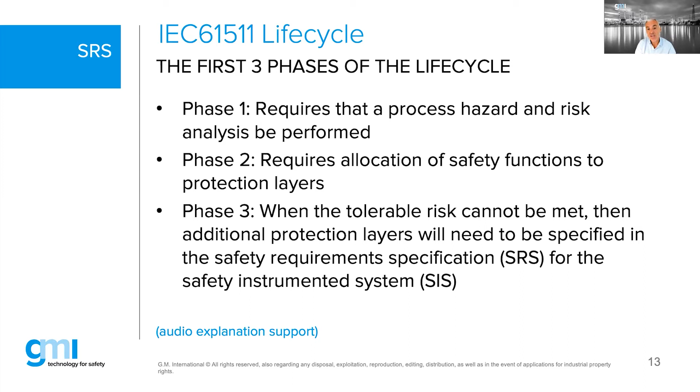I got the first poll question that Mauro will launch, and I will read the question in the meantime. I would like to talk about the ownership of a safety requirement specification before we start the webinar. You have the following options. Does the ownership of the safety requirement specification lie with the safety consultant or safety company? B, the engineering contractor, the EPC contractors, responsible for the SRS and its quality. Or the SIS integration team.

Or it is the operating company or the end user who has the ownership. Or the operator and maintenance teams, the people responsible to maintain and operate the SIS on site. Or the MAC contractors, the main automation contractors, or G, all of the above. Which one do you think has the ownership of the safety requirement specification?

Okay, we are getting a good response so far. Let's wait a few seconds again to give everyone the chance to answer. I see quite diversified answers, so you will comment later on, Tino. Mm-hmm. Good. Let's give it another few seconds, then stop it and share the result. I think we can stop it here. Shall I share it? Yes, please. Okay, here it is.

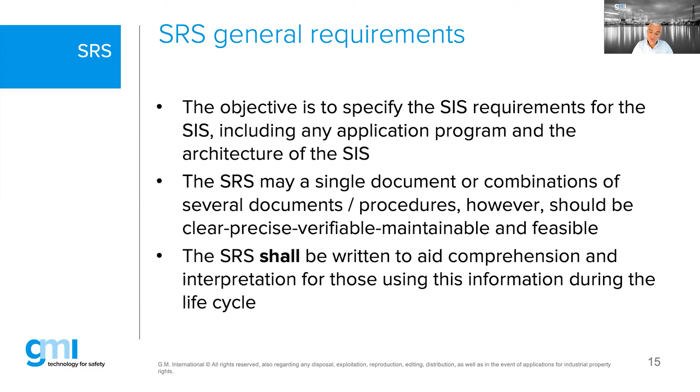The SRS may be a single document, but in reality, it's almost always multiple documents. The more documents you have, the more of a challenge, call it a mess, it will be in the future to maintain a clear revision between all the documents. Of course, an ultimate document would be everything in one, but that's nearly impossible or impractical to maintain and also to use. But the standard describes that the safety requirement specification needs to be practical for the people who need to use it. The SRS shall be written to aid comprehension and interpretation for those using this information during the life cycle.

Now, the standard is very clearly and very strongly telling you the following sentence, and I actually copied the sentence, which does not often happen in some of the webinars. I'm relating my story here to part 1 of the standard. Part 1 is the normative section, in contrast to part 2 and part 3, which are the informative sections. For us as safety engineers, for everything in the normative section no discussion is possible. It is what is written in the standard. And if the standard says you shall do it, then there is no debate possible. You shall be able to provide evidence if you want to comply with the good engineering guideline called IEC 61511. So it states the following sentence.

It describes 29 specific requirements per safety instrumented function that shall be sufficient to design the SIS and shall include a description of the intent and the approach applied during the development of the SIS safety requirements. And I put something here in blue. The sentence finishes with "as applicable." You can already imagine, if you are a creative engineer, you can say, well, I want to list my 29 items and I want to answer not applicable. And mainly the engineers will abbreviate this as N.A., not applicable, because it's very easy for them to cut, copy, paste.

I can tell you that when we are doing an assessment on site and some engineers or end users give us a safety requirement specification and we see multiple not applicables, we may be very critical to understand why you believe it's not necessary to describe this. Because you have to figure out the following. Someone who opens this document, who has zero know-how of what went on before the document was released, needs to be able to clearly understand what needs to be built in your factory or production unit to achieve a safety function that works to achieve your safe state.

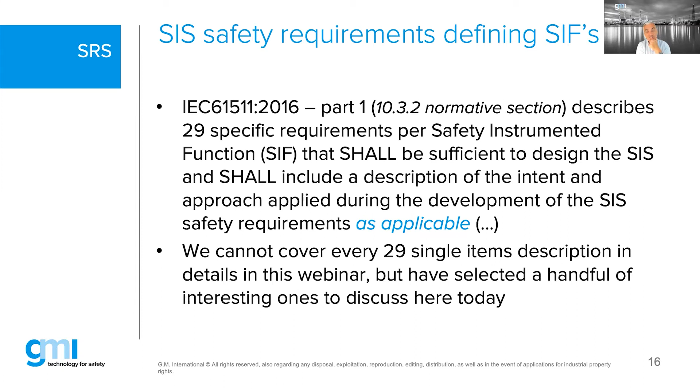We will, of course, not cover it all here; as Mauro is saying, we only have a maximum of 1 hour, and I typically keep my speech between 30 to 40 minutes. I always overrun, but I will try to do my best today. But we will not be able to handle all the 29.

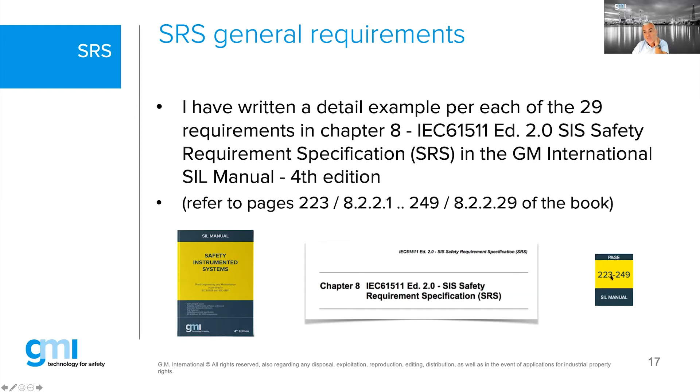But in that book, which is the 4th edition, in chapter 8, I have been including an exact one safety instrumented function, including all those 29 different items. That means that I have been describing the definitions from a standard, bullet per bullet, starting on 8.2.2.1, all the way down to bullet 29. Bullet 1 starts on page 223, and it goes all the way down to page 249, which is the reference given from the book from GMI.

Typically, a safety system is working through a digital output. It may go through one of the interposing relays, and make sure that you choose a safety integrity relay and not a normal interposing relay. Otherwise, you may lose the complete integrity of your safety loop. But assume that you use one of the safety relays from GMI, and you are connecting this to the load of your solenoid to open or close it, maybe to cut or supply the instrument air that goes to a shutdown valve. Well, that's a classical safety loop. So safety loops are typically controlled by digital output. It's on, off, open, close, start, stop. That's all we do in safety.

But we need to know exactly how fast we have to achieve it. From the moment we measure to the moment we achieve our safe state, we have a definition for that. We will call that the response time. Your safety instrumented function response time, between your measurement and achieving your final output, your safe state, needs to be maximum 50% of the allowable process safety time. So as a rule of thumb we take the process safety time divided by 2. We will seek in the industry installation instrumentation that can fulfill that timing.

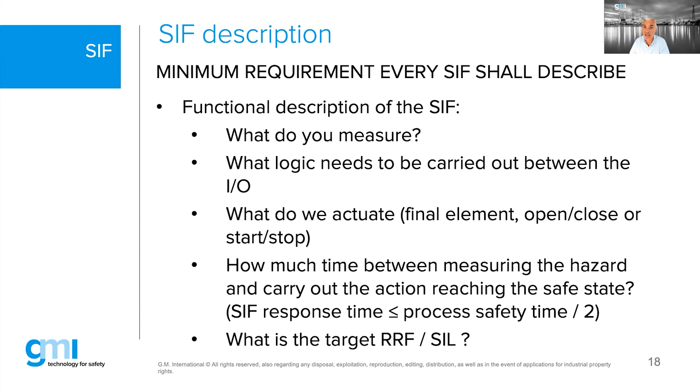And the last one is, what is the performance that this safety loop needs to have? Do you have to have a risk reduction factor equal to a certain number, minimum or more? Those are the kind of minimum information that we would like to see for every single safety function. Besides this, what else can we discuss? For instance, every single safety loop will be linked to one unique hazard or one unique hazardous event only. That means that every single safety loop in your industry needs to be dedicated in the description. What hazard does that loop try to prevent me from?

Bypass requirements. I'm pretty sure that most of you have seen bypasses. Well, it's always necessary in the industry once in a while to activate a bypass. The whole question will be, can you guarantee your safe state during the time of your bypass? That is the number one question. Number two question, how long do you allow this bypass to be on? Because you're starting to potentially degrade your safety availability by initiating a bypass. So what edition 2 is now requiring, you need to prove evidence that you first will foresee compensating measures before you are allowed to activate a bypass.

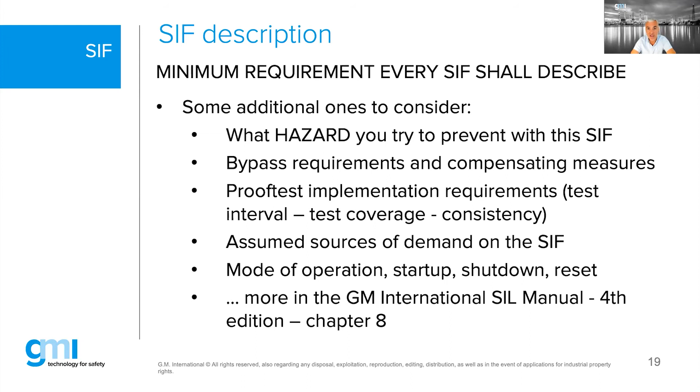What are some of the challenges? Some of the edition 2 challenges, regardless of the years of experience of some people I have been talking with, it's a challenge to understand what distinction the new edition 2 of the 61508 from April 2010, followed by the 2016 edition 2 of the 61511, now makes between the mean time to restoration, the second bullet called the MTTR, and the MRT that used to be called mean time to repair.

And if you have some specialists listening into this webinar, if you go back into your calculation prediction of availability of your safety loop, meaning your SIL verification calculation, you may quickly see that some of the calculations focus on an MTTR of 8 hours, 24, 72, or 96 hours. There are even some commercial calculation packages that limit you to fill in maximum 300 plus hours. And the reason for that is very simple. If I would put an MTTR in there of like 5,000 or 10,000 hours, my SIL may be gone.

So if you look at the MTTR now, which is the bottom graphic here that I have made, the A time is the time that you will need before you find out that your SIF is not working. When do you know your valve is stuck open? Well, very simply speaking, when you try to move the valve. If you never move the valve, you never know the valve is stuck open.

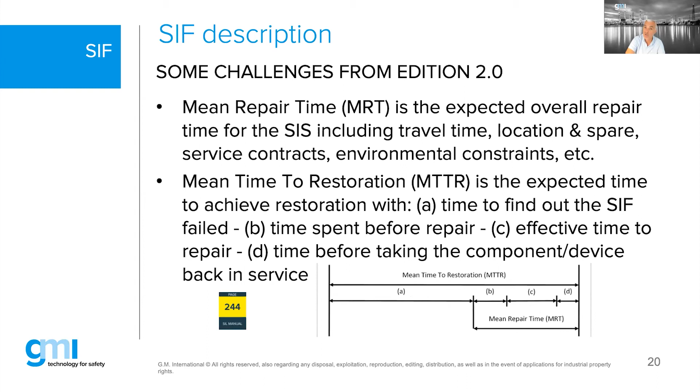Mainly in the field, it's always the A time, which is the time which is very close to your proof test interval. The last slide on the SRS that I want to give to you is, I mentioned this already, the target will be to provide information to the person who will program the safety PLC, so that he or she knows exactly what logic needs to be programmed between the inputs and the outputs. That sounds maybe a very simple explanation.

But if you think about it, and I give you a clear example, my history is I've been working for many of those safety PLC vendors in my career. And I can tell you that if you take a 2 out of 3 function block from vendor A, and a 2 out of 3 function block from vendor B, what do they have in common? They both call it 2 out of 3. But the internal kitchen, the internal structure, functionality, the way they are built is different.

That means that for the information given to those types of people, you as an end user responsible to maintain safety on site need to tell exactly on paper what needs to be programmed. And I fully agree that that paper is mostly made by engineering contractors or maybe safety consultants, etc. Doesn't matter who makes it. You have to use competent people to define it. You have to use competent people to program it. And then you have to have competent people to prove it is working as per requirements, etc.

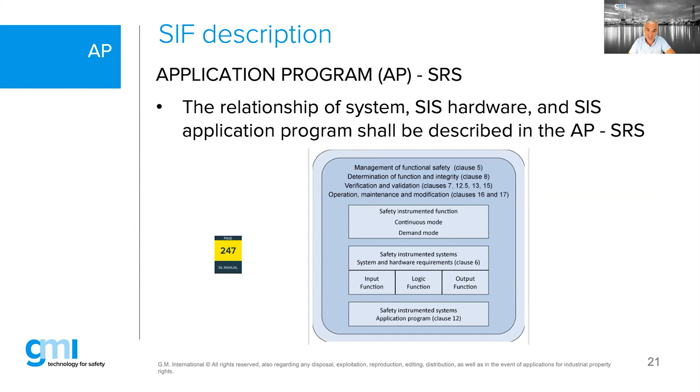Okay. I was expecting you would talk longer because I was just drinking some water. Anyway. Ah, okay, sorry, I didn't see you because the poll was covering your face, so sorry.

No problem. So, these are some typical questions we see people in training courses struggling with. Would you consider the SRS as a design specification document? Would you consider an SRS, in the long run for the end user operating company, as an operational instruction document, or as a maintenance instruction document? Would you consider the SRS as a SIL verification reference document? Would you consider it as an as-built document? Or would you consider it as all of the above, meaning it could serve for everything? What is your opinion on this poll question?

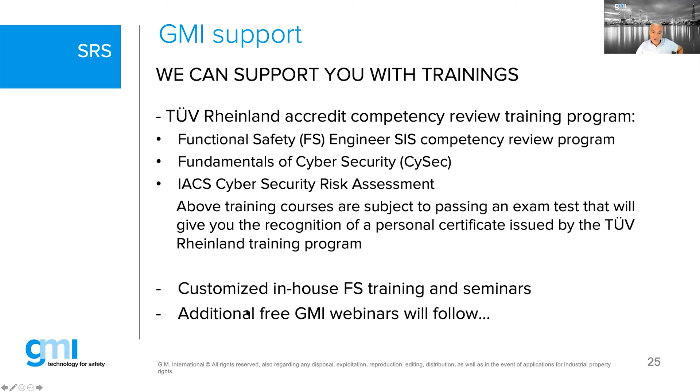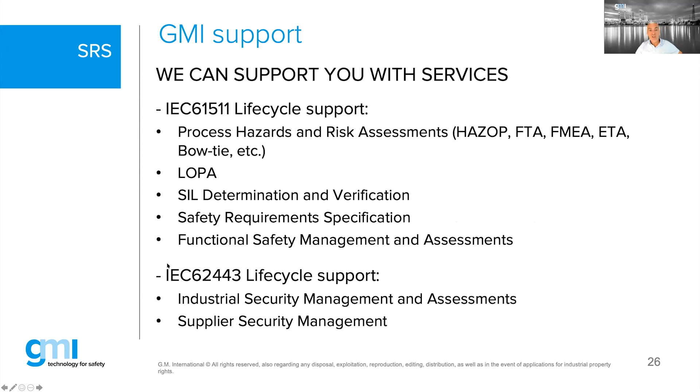That means on all the lifecycle activities, both the lifecycle for safety, which is called the 61511, or the lifecycle support for the OT security, which is called the IEC 62443. We can provide you with some of those services.

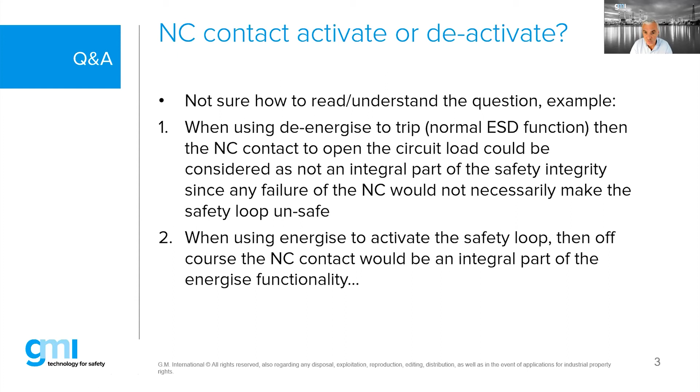Yes, Mauro, next one.

This is one coming from the previous SRS. We also have done an SRS, I think, earlier this year. There was one person: what are the must and mandate points that can be compromised in an SRS report? Question mark. Yes, Mauro. Well, as per standard, if you look at the details from a standard, the standard would require that 29 shall include and shall describe.

But of course, that is wishful thinking. In reality, we hardly ever see an SRS where all the 29 items will be listed. On the other hand, I have to agree with what the standard is calling a good engineering practice. The more and better and detailed we describe a safety loop, the more chance in the future we have that people will not be able to make a mistake by building exactly the loop as been specified.

Of course, this is subjective for most engineers because they typically think that it is not applicable for them or believe that, well, the people should know in the future what this really means, so we don't have to describe this. This is often the case. I propose to use a generic template for a SIF. And there are many different templates already available in the market.

I see this often when we see projects, without giving you a name, but when I see an EPC contractor X, well, I know already the layout that the EPC contractor X will use for the safety instrumented function templates, because they have been using it for the last, let's say, 10 years in the industry. Nothing wrong with that. The question is, are we really sure that this template, which they cut, copy, paste on all the projects, is every time what we like to see when we make an assessment? And the answer is typically no.

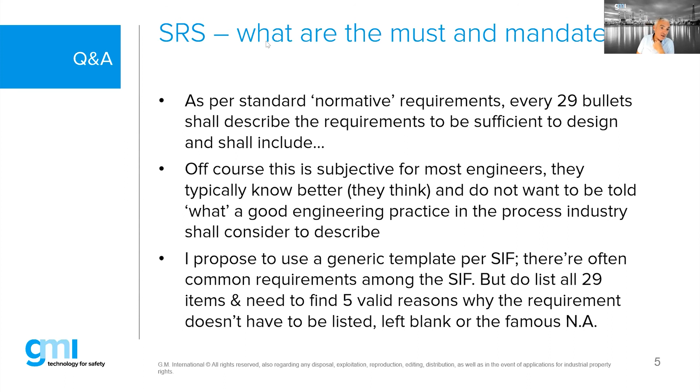The last two questions we have now. The life cycle of the safety requirement specification with respect to IEC 61511 and adherence post-commissioning. I'm trying to remember the question, cannot remember for the moment. I hope I remember when I see the answer. Okay, what was the question here? SRS, okay.